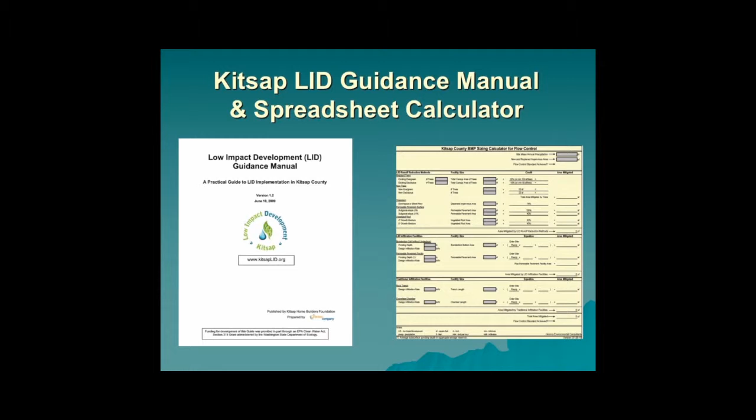And the little thing you see here on the right, a spreadsheet modeling tool for small projects. You can actually put in the numbers in there, and when it says down at the bottom it passed, you've now complied with all the modeling, and you can actually use that for all the cities in the county for compliance for your stormwater.

So we also, along the way, applied for a grant with what was then the Puget Sound Action Team, and actually I have my grant manager here, Mr. Bruce Wilkin, and we actually took the Home Builder Association site and retrofitted it, everything outside the building footprint, to be a demonstration for a wide variety of the products. Let's just talk about the process. And before and after, the building didn't look any different, but the site did.

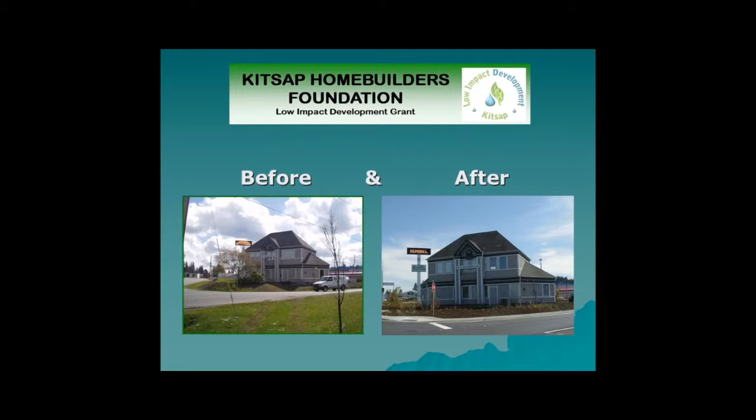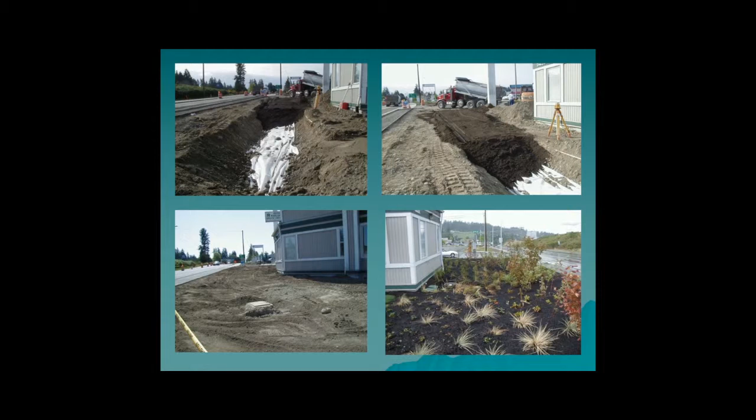And we excavated, as I said, everything outside the building footprint, put several types of pervious pavement in, a large bioretention cell, amended the soils, native vegetation, built a shed with a vegetated roof. The city of Bremerton was widening Auto Center Way, which is adjacent to our property at the time, and they were adding some sidewalks, so they made their sidewalks pervious to match our project. That's what you see here.

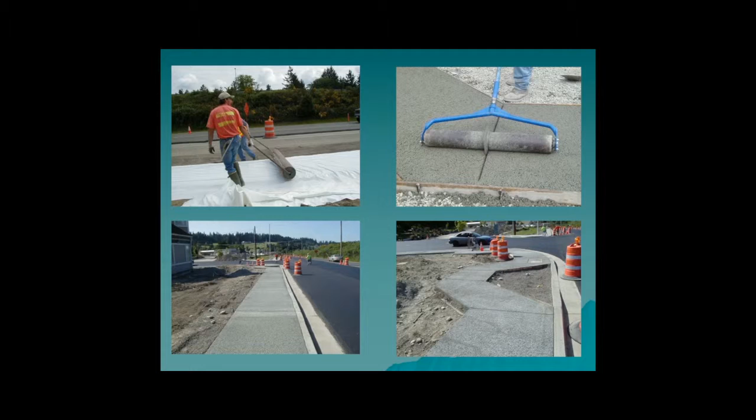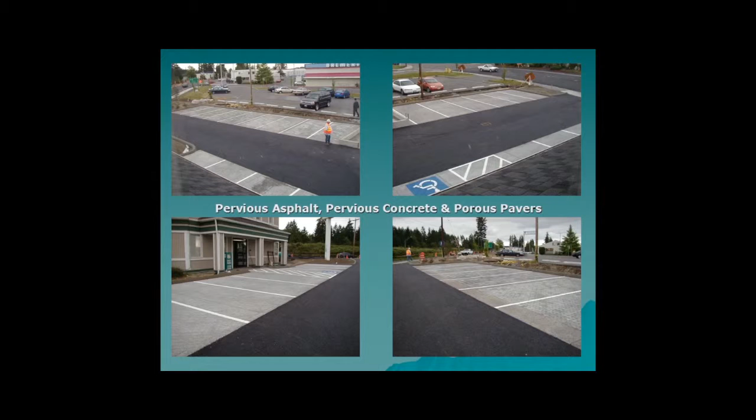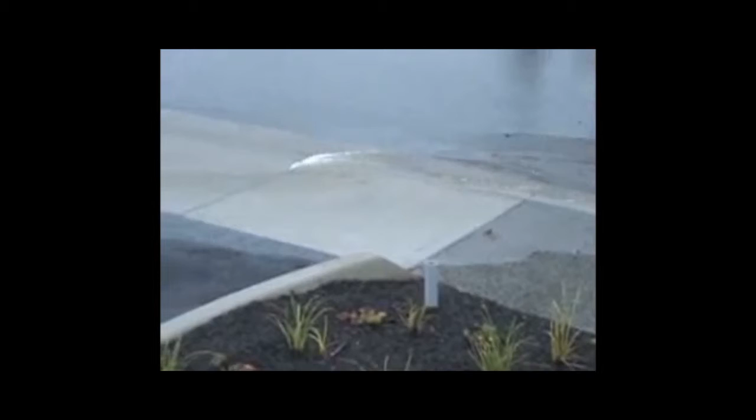We put pervious asphalt, pervious concrete, and several types of porous paver blocks all in the project. They look nice, a little nicer than I thought they would be when you're mixing so many types of things. But it gave a demonstration of a number of the different types of products that you can use. This is planting the native vegetation, and let's see if this will work. And this was what was happening. This is on the sidewalk on the right side of the site, and the water's higher than the curb.

And then remember, rain started Friday night, and this is Monday morning. You can see how heavy that flow is and running everywhere. And see, the site has an awful lot of runoff on it. Okay, what you're looking at is pervious asphalt, and then the parking lot up top is the pervious concrete. And then further, still pervious asphalt, and these are all porous paver blocks. And you can see how this site handled 12.5 inches of rain over 48 hours.

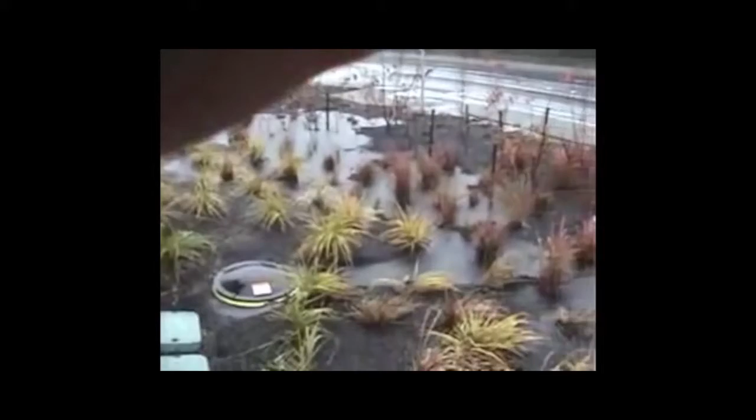And this is the large bioretention cell we built, and you can see that it is well above what we intended it for. And this was not engineered, by the way. And that little thing you saw over there is we also did roof drains into a 300-gallon tank, and the overflow goes in the rain garden as a rainwater harvesting example.

This is when we came back that afternoon. And now we look at the rain garden 4 hours later. Much of the water is already infiltrated. Next was Tuesday morning, 24 hours after the first video. There's essentially almost no standing water, working as advertised. And I was actually accused by some engineers of scheduling the rain so I could video it, because they thought it was pretty amazing. Here's your bioretention cell 24 hours later.

And that's just a demonstration of how effective that works, because this site on the retrofit project was designed as a demonstration. It was not engineered. But we still did things there that really worked well. Then in 2011, I started working for the Building Industry Association of Washington. In 2012, we helped get them the money to develop the technical training, which is ongoing now.

By the way, it's free for 2 more years, folks. Take advantage of it. After that, it's going to be market-based. You'll have to pay for it. I encourage each of you, if you're not engaged in your local government process, get engaged. Because if you aren't engaged in the process of adopting, you may not like how it's going to work. Take your technical expertise and help the jurisdictions get it so that it works well.

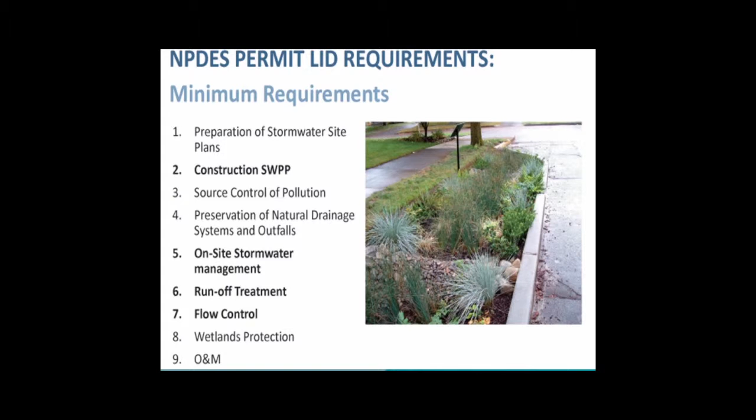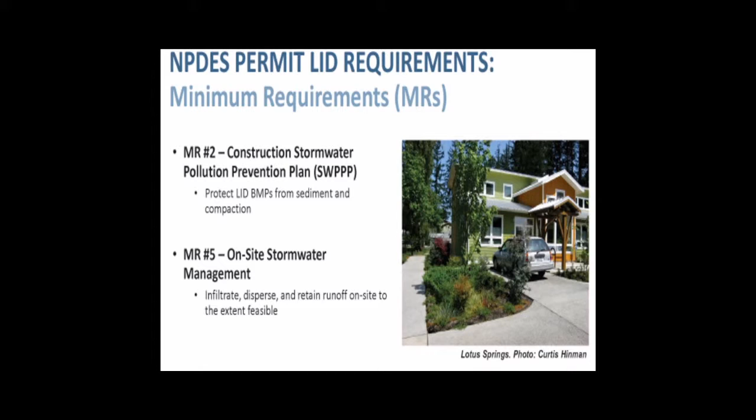I know Dan talked a lot about this, but there are minimum requirements. We know we deal with stormwater during construction phase. We need to deal with the source of pollution. We need to preserve natural drainage systems, deal with the treatment, and deal with the flow control and protecting wetlands. And protect low-impact development BMPs from sediment and compaction during construction, and infiltrate, disperse, and retain runoff onsite to the extent feasible. Water quality treatment for pollution-generating areas, and control peaks and flows.

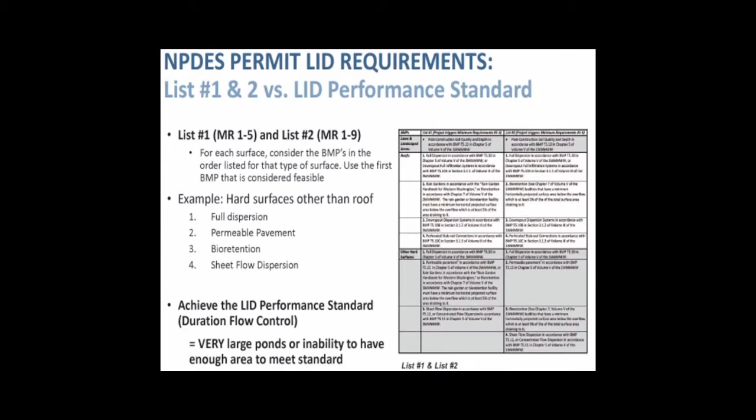And this just has a chart talking about the difference between do you go prescriptive or performance. And I'm a bigger fan of performance because I think the engineers can do it. The feasibility analysis may have an inverse effect of helping engineers and other people find ways of proving that it's non-feasible rather than getting excited about how they can make it work. And I think that's a little disincentive that was built in the regulations, personally.

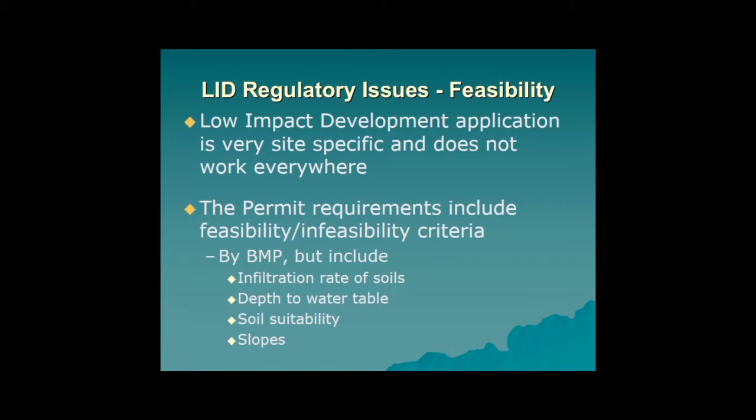So now this is the feasibility. Every site is not good for low-impact development for a variety of reasons. Low-impact development and use is very site-specific. You can use a lot of the techniques, but especially the infiltration techniques can be limited, and the permit requires feasibility and infeasibility criteria, and they're included by BMP, but they include things like the infiltration rate of soils, the depth of your water table, the soil suitability, slopes, and things like that. It's how they're going to be effective. And this is what you are going to have to get used to, both the regulator and the regulated community, in dealing with stormwater design.

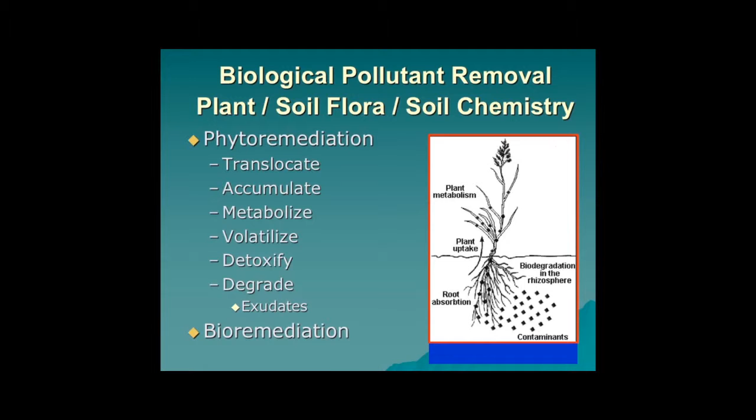Now I want to talk a little bit about science and how low-impact development works. The biological pollutant removal in the plants and soils is very effective. In fact, I put a little handout out here where Dr. McIntyre with NOAA and also with WSU Extension has just published her study where they actually took the stormwater runoff off of some Seattle bridges, diluted it and put it in with small fish and the insects that they need to survive, and all of them died. They then went through bioretention soil columns, and that by itself, without even the vegetation, removed pollutants so that they all lived and thrived, both the fish and the insects. It's very, very effective at naturally treating the pollutants.

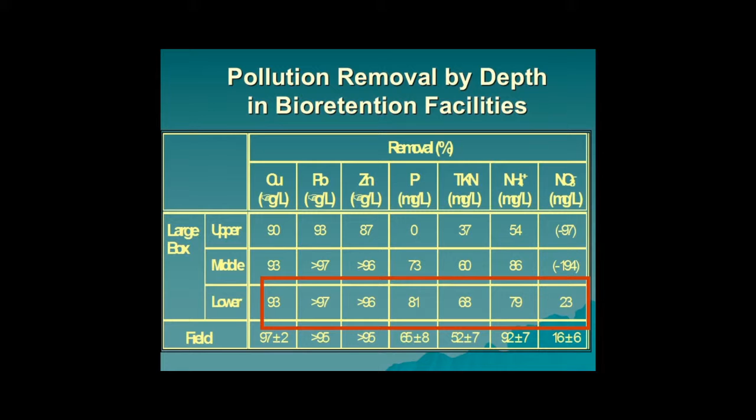That's pretty exciting. Because what are really the big three things we're concerned about with runoff? One, it's carrying a lot of pollutants which have negative effects on the fish and the insects and other things. Secondly, if it goes into the stream, it's the wrong temperature for the insects and the fish. And third, we get peak events which cause erosion of the stream corridor. Low impact development shows how effective the pollutant removal is in bioretention.

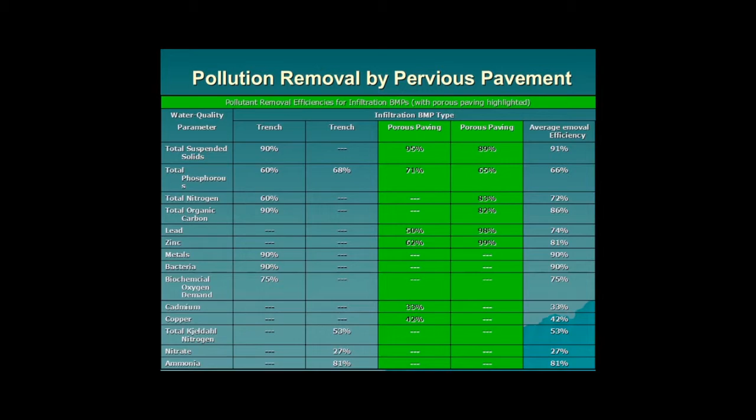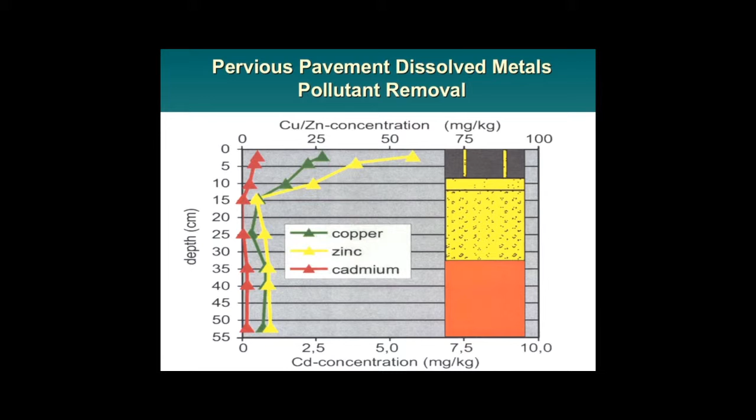And this is from Europe where they actually tested the column of the pervious pavement and the soil looking at dissolved metals, and it showed by the time you got back to the soil layer, they were back to natural concentrations that are in the soil already. That's how effective these can be. The other side is that bioretention infiltration techniques allow the water that seeps back into the stream or the waterway to be the right temperature. So it's no longer scouring, it's seeping, it's the right temperature, and it's clean. You're mimicking the pre-development hydrologic conditions of the site.

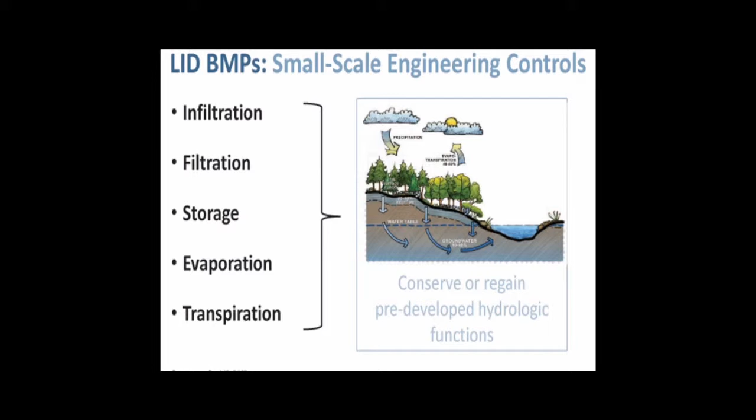So why low impact development? We've probably all seen the charts where you say that as we get more impervious surface, we reduce the amount of infiltration and evaporation, and we have a lot more runoff.

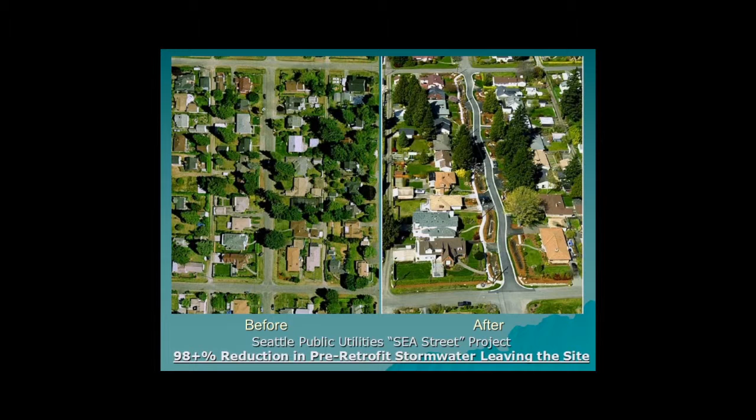But low impact development is simply to make a developed environment like this function like it did in the pre-development environment. This is actually the aerial shot of the Seattle SEA Street, one of the first Seattle Public Utilities projects, before and after. And this is now 12, 14 years old, I believe. And in excess of 98% of the water that used to run off those sites no longer runs off the site. And they reduced the impervious surface and put a series of bioretention cells along that city street.

And essentially, it's conventional versus low-impact development. Conventional is end of the pipe. It deals with peak discharges, very limited on small storms, and it's sort of 60s technologies. Remember, we ask our engineers to take care of stormwater. Why? Because it flooded, and we treated that as a waste product. We want to get it away from us as quickly as possible. Low impact development is a source control. It can mimic pre-development hydrologic conditions, full control of small storms, and it also prevents pollution.

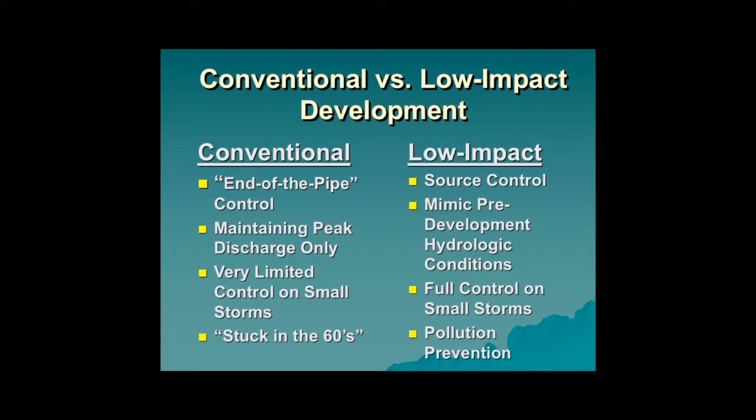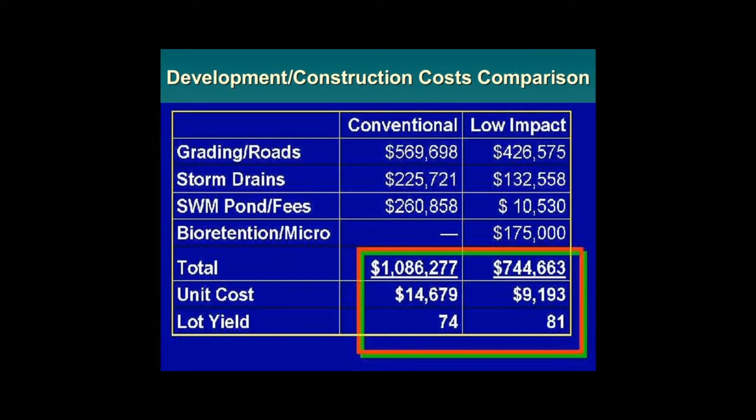And this is a project from Maryland that showed that by incorporating low-impact development rather than traditional stormwater, it reduced development cost on lots by about $5,000 a lot and actually allowed another 7 lots to be created. It can become very cost-effective, and actually, when you're looking at the whole scale of development, can make economic sense. This is another project that EPA did, and you can see on the right-hand column the effectiveness in reducing development cost of low-impact development when it's understood and done well. The Kensington estate had some other issues that need to be dealt with separately.

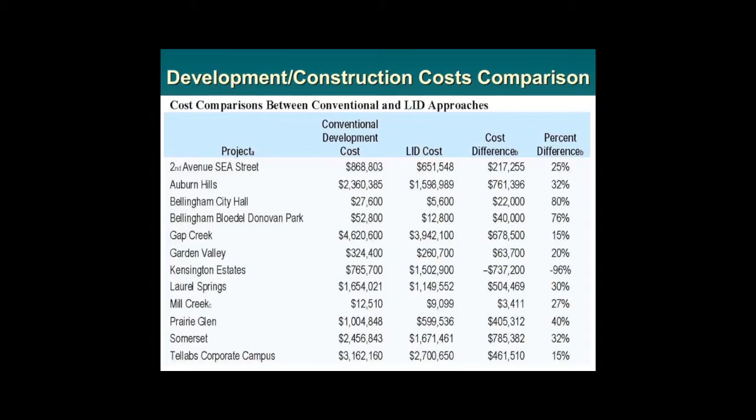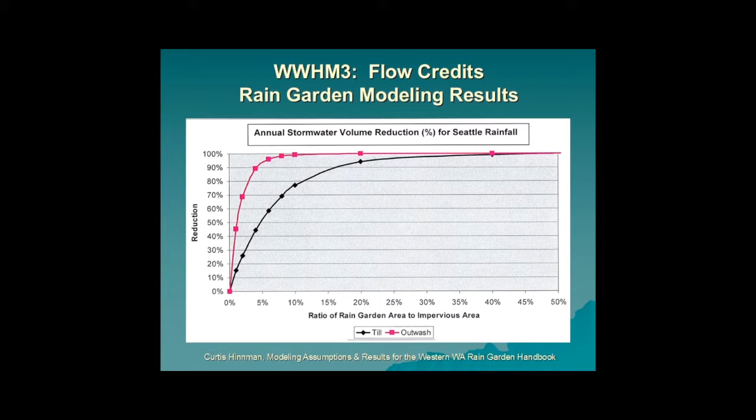This is something called rain garden modeling. This was actually out of Dr. Curtis Hinman's rain garden handbook for citizens, and most of you have probably seen that. But this was actually engineering, so think of this as a bioretention cell. And when I first showed this, it really caught the engineers' eye. Because what this shows is that if you have bad soils on your site, if you do a bioretention cell or a rain garden that is 20% the area of your roof, you'll catch about 95% of all the rain that falls on your site in a year. And if you have good soils, one that's 10% of your roof area will handle 100% of all the rain that falls on that roof in a year. That's pretty effective volume control.

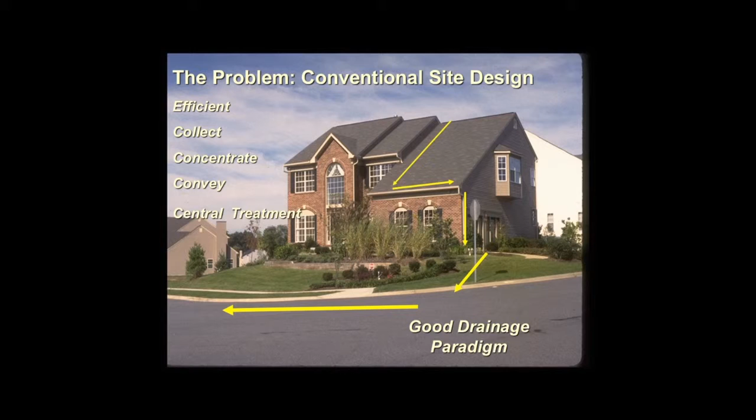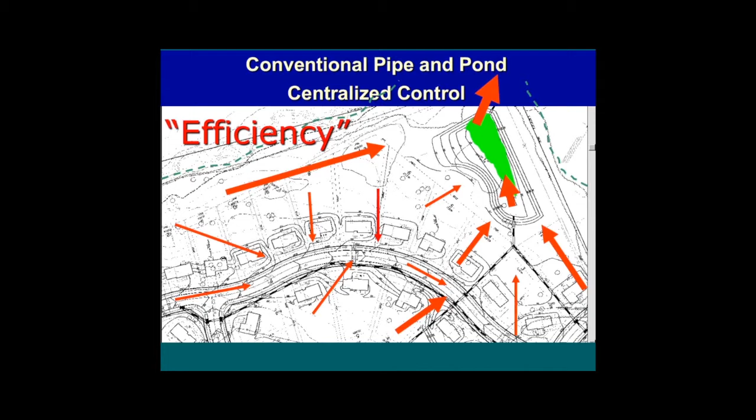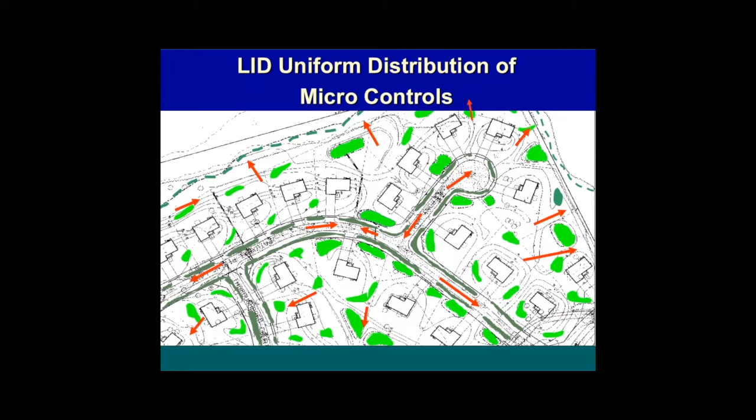But here's one of my favorite techniques, and most folks don't know about it. It's a tree credit. If you retain trees or plant them, if you retain them, if you have evergreens, you can take 20% of the canopy area and deduct that from the amount of impervious surface you have to mitigate. Now, you're limited to 25% of the project, and it has to be within 20 feet of ground level impervious surface. And there's a difference between evergreen and deciduous, and if you plant new trees, you get 50 square feet for evergreen, 20 square feet for deciduous. In many projects or most projects, you can mitigate 25% of the volume you're going to be dealing with before you get started.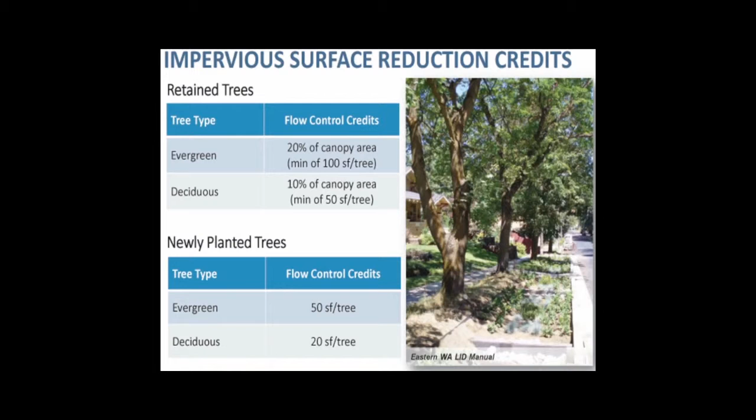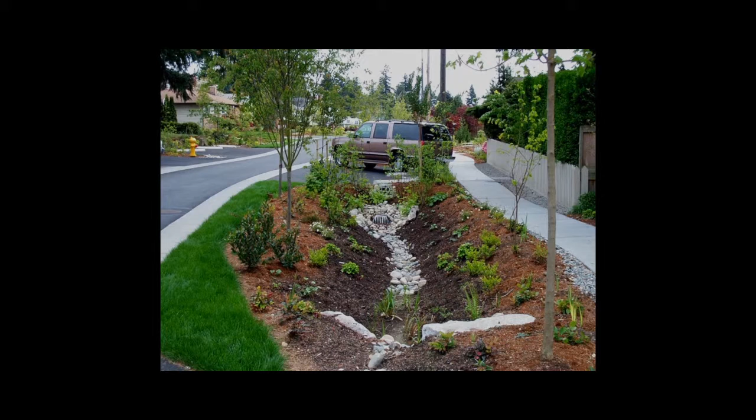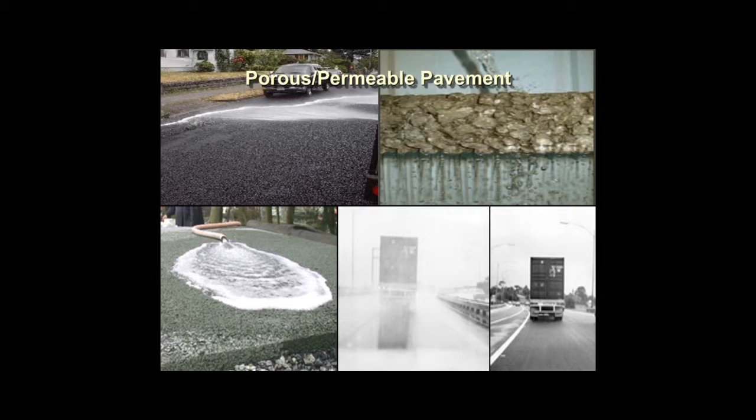Bioretention, this is a picture of a cell. This actually is functional landscaping up top, but that's actually bioretention, dealing with your stormwater. This is one of the Seattle SEA Street bioretention cells. You can put them in all kinds of designs, and we'll talk a little bit about that in a minute. This is actually 2 bioretention cells in an apartment complex in Portland that deal with all the roof runoff. And now porous pavement. Porous pavement is some interesting and fun stuff. It really, really works. This is actually a city street in the city of Bremerton that put pervious pavement on city streets.

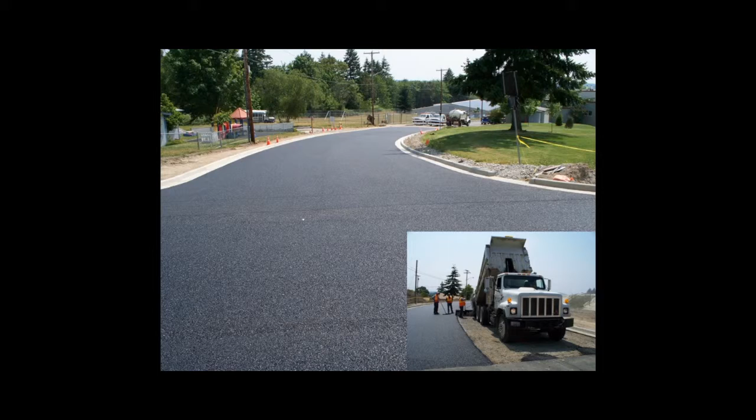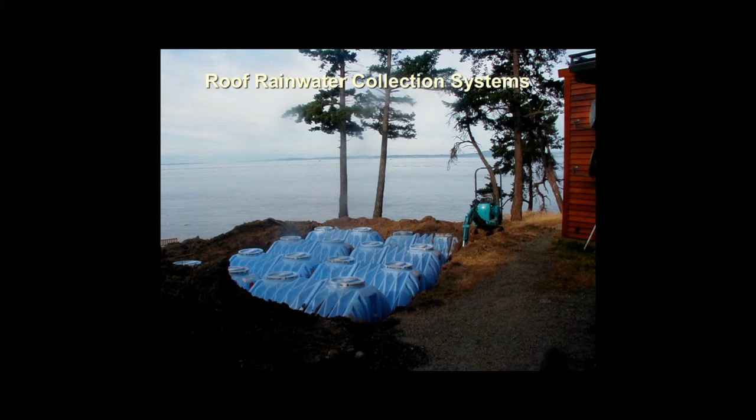Pervious concrete, porous paver blocks, reducing impervious surface, amending soils, rainwater collection. This is off of one of the islands. You can do it in your home. If you can do the water budget, determine how much rain is going to hit your roof over the year based on the modeling and how you're going to use it through the year, and if you use all the water you're going to collect, your roof is then treated as if it was landscaping instead of impervious surface. It's a stormwater mitigation strategy.

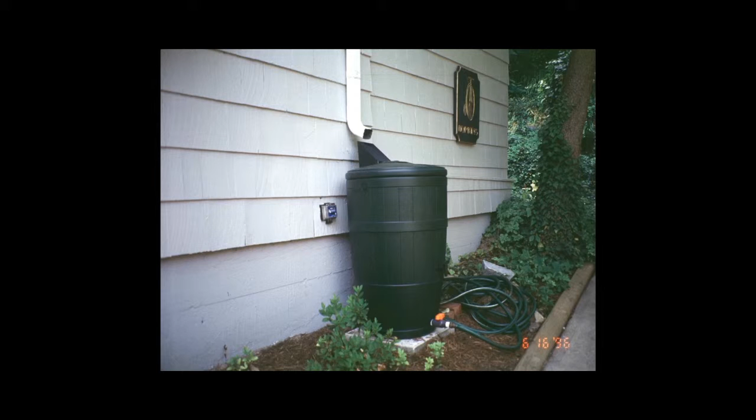There's minimum excavation foundations, vegetated roofs, surface dispersion, and those are your primary techniques. And how you blend them into your project is how you're going to be able to manage your stormwater. And the question I have for you is, what are each of your cities and counties' timelines for updating? You've seen what Pierce and Tacoma is. Think of what your smaller cities are. What is their plan for reviewing the development-related ordinances relating to low-impact development, and how can you become involved? Because you need to take your expertise and help them implement this so that it's going to work.

And if you don't find the solutions, you'll have to live with the outcome of it. As I said, it's time to be engaged, and I encourage you to encourage your local jurisdiction to consider some incentives. There's some up on the website. I put a few copies out here, just some unranked ideas that you can think about or talk about among your own jurisdiction. Every jurisdiction is going to have their own interest, and so look at that. Be flexible. Find things that are actually going to work. Here's a couple of questions.

Should low-impact development be in the right-of-way or private property? I'm a big fan of having it in public right-of-way because the jurisdiction who has the NPDES permit is going to have to inspect that annually. Who should be responsible for that maintenance? Should it be a homeowners association, the individual property owner, or the jurisdiction? That's a question you're going to have to answer in each jurisdiction. And for instance, here's another one. What should be the traffic volume before you say, well, we think that volume is high enough that we no longer want pervious pavement for that volume of road, and that capacity of road?

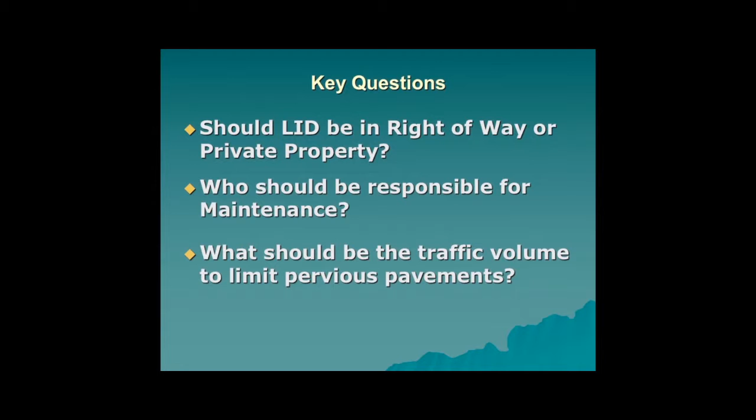When you're integrating low-impact development in the codes, which is something you heard folks talk about early this morning, think about when you're landscaping. Why not look at bioretention and rain gardens? Why shouldn't they serve the same purpose? Vegetated buffer, same thing, plus the tree credit. You have a tree ordinance. How are you relating that to the tree credit? Sidewalks and bike paths. Why not have them pervious?

Parking lot areas, integrate low-impact development, and on a parking lot especially, not all of it has to be pervious. You can have portions that are impervious and portions that are pervious, because when you have the aggregate bed underneath, you still have that full surface area infiltrating. So it will work that way. Be creative in your design and how you're going to allow those designs to be done, and allow those mixed types of pervious pavement in the projects. There's some stuff here, and I hope some people will talk about it later.

WSU Extension has this with Department of Ecology technical training. It's now being run. This is the website down below, and these are the technical classes they're setting up, and they're ongoing. And I encourage you, because right now they're free. In a couple of years, they won't be. They'll be market-based then. This is some of the best technical knowledge, and I talked earlier about the importance of technical knowledge, because of the first questions the engineers gave me when I first started helping this process on Kitsap: okay, it's a good idea.